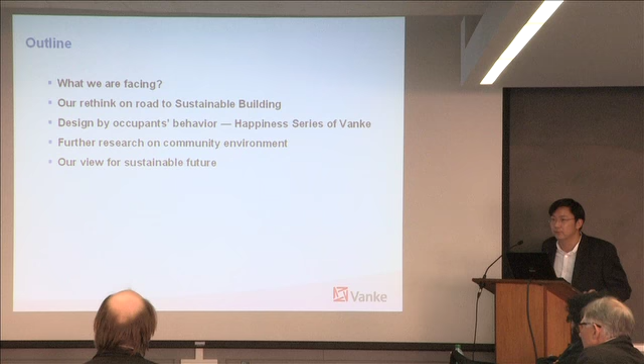First of all, let's see some interesting photos. This is 20 years ago in Pudong, Shanghai. See, there's nothing there, only vegetable gardens or trees. After 20 years, Shanghai changed a lot, becoming a new city, especially Pudong. So you can see 20 years changed a lot, 20 years made a new city in China.

Same for not only the coastal city, but also southwest cities like Chongqing. Chongqing is here, inside Sichuan province. This is the famous CBD commercial center in Chongqing, and you can see a big difference in 20 years. These two rivers, the Yangtze River and Jialing River, have different colors.

And this is Shenzhen. Shenzhen is quite close to Hong Kong, and some people may have been there. Here you can also feel the change sharply, many high towers rising in 20 years. In this CBD, you can see it after work, with cars parking on this high bridge. Before 20 years, it was just many hutongs and local buildings around. You can see China is growing very fast.

There's some data: in the past 20 years, we experienced the fastest urbanism around the world, and Chinese urban population increased by the equivalent of a fourth of U.S. citizens moving into Chinese cities. That's great, because we should build houses for such a great number of people. In the coming 9 years, it's also expected that the equivalent of 1/3 of U.S. citizens will move into Chinese cities. This is the greatest number.

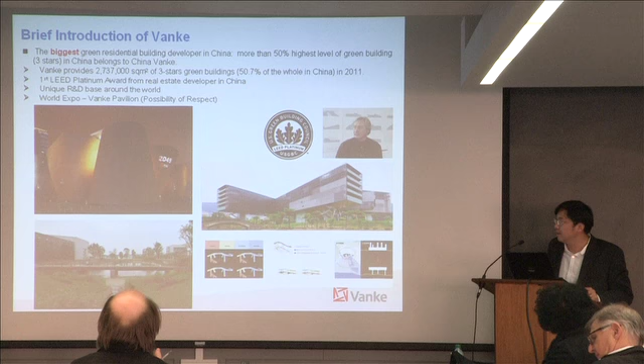I think some students of you from GSD have been to our R&D Center in Dongguan. This is a very big R&D Center. We do more research for building technology and also prefabricated concrete technology. I think some GSD students have been there.

Under these greatest, biggest, and fastest situations, we need rethinking. We can do some green buildings according to national standards, like 3-star or LEED, but this is only following the standard. These green buildings haven't raised a very good response from the market, maybe because we develop this for the government. So is it the only road to a sustainable future? We think about that.

There are 2 cases that help us rethink the future of sustainability. This is a good case, also a good market case because it has good sales, with a sale price around 20% higher than us. This building is quite interesting and comfortable with many high techs in China - for example, heat pumps, good air tightness, and shading around the facade. It also uses the latest European technology, ceiling radiant, and fresh air all around the house.

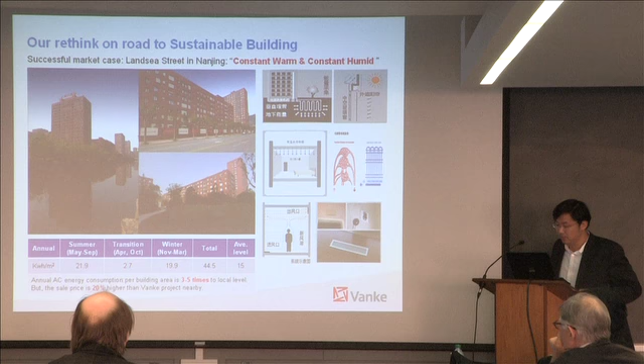There's also an interesting comparison of air conditioning in Beijing, where we can see different AC systems and their relevant net energy consumption levels. This slide is from some conference, showing 5 cases - 3 cases belong to split AC air conditioning, and D and E are for individual central AC and fully central AC. The interesting result is that split AC is the most energy-saving equipment in this market. This split AC is really traditional and you see it everywhere, while here there's much newer high technology, but the energy bill is not good.

So we're also thinking, what is the sustainable future? Should we use high tech to make our buildings more advanced, or should we think another way? We're thinking about the difference in energy consumption that comes from usage mode - part-time mode or full-time mode. This building uses what they call constant warm and constant humid controlled by one system, maybe just by one measurement to control the machine. So the different behaviors of different spaces will influence the system.

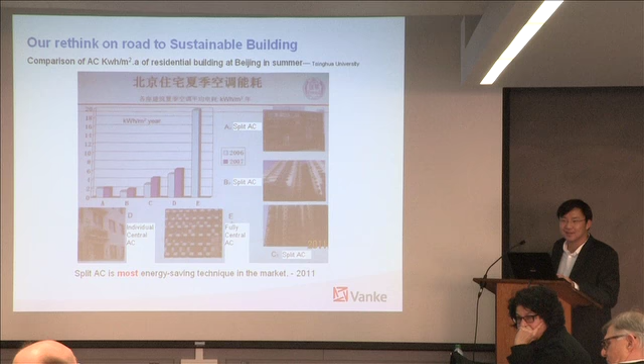So that's why we think about sustainability. We think of sustainability as a combination of three parts: one is market, one is customer, and one is energy bill. Because the market comes from the customer, and the energy bill also comes from the customer. So we should know about customer behavior, and we should also make the customer know this building well.

Then they can easily control and use the building more reasonably. Also, if the customer can feel the benefit of a sustainable building, they can buy this building again. So I think sustainability is not only about energy saving, but also the long-lasting usage by the customer, and also recognition from the market.

So the customer, in our words, also means occupants. The occupants need to know how to operate buildings well to achieve sustainable green goals. We should also try to make the occupants feel the difference of sustainable buildings, because now some people say the green is inside the wall and nobody knows it. Since green is a long-term effort, you should make people know this green building truly works well.

And this will make the customer buy and recommend this green building again, and this will achieve sustainable commerce. Combining all this together, I think we will really achieve the sustainable building.

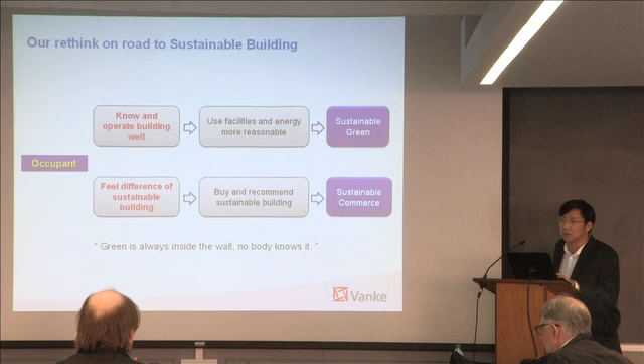Okay, then this is what we want to do. In the last 2 years, the Chongqing region of Vanke developed a new series called the happiness series. At the beginning, there are two pieces of background information. One is that our main customer in the Chinese residential market is the first-time buyer.

First buy means it is the first house for the couple. The characteristic of these first-time buyers is that within 3 to 5 years of their new home, their family structure will change a lot, because once they buy a house, they will have children, and in China, his or her parents will come to live with them to help raise the children. So at the beginning, there will only be 2 persons in the house, but in the coming 3 to 5 years, it will become 4 to 5 persons inside the house.

So we think about how to design a house, how to design this layout to accommodate this sharp change. Also, these first-time buyers take up close to half of our customer share, so this is our main customer. So our product is designed to satisfy these first-time buyers.

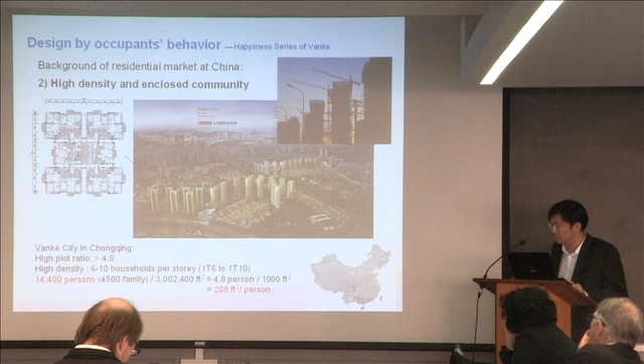So what's the purpose of the happiness series? We should provide more functions because families need to change in a short time. We should achieve more function with less indoor area, because the total cost of the Chinese resident market is quite high, and it's expensive for young couples to pay for new homes. So we should make less indoor area with less payment pressure.

This is our key value: we want to develop good and affordable apartments for common people. Good means good performance, meaning a sustainable building. Affordable means smaller indoor area with low total cost. Normally the layout of each family is around 60 to 90 square meters.

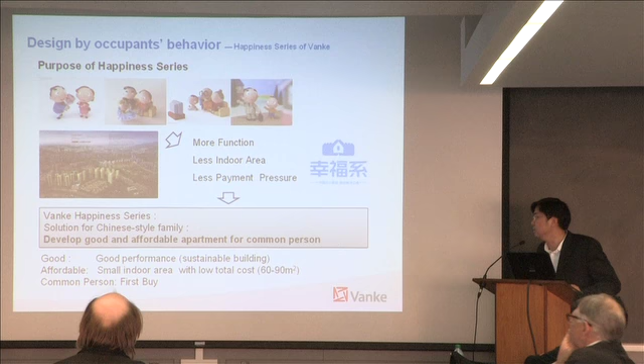So how do we decide a good house? This is a very famous formula showing where energy consumption comes from: P times S times E times C. As a developer, only the E we can try to address, because we cannot reduce the population, and the number of persons using equipment will increase fast anyway. The carbon dioxide per unit energy is controlled by the government.

So what we can do is reduce energy per equipment, which includes less time to run equipment and less energy per equipment. Less energy per equipment depends on the market level, because this belongs to manufacturers or big equipment companies, and also depends on what's available, affordable, and accessible.

So the only thing we can try is to make less time to run equipment, and we think this depends on occupants' behavior.

Less time to run equipment includes two parts: active design and passive design. For active design, we can use many sensors, databases, and HMI, IoT, Internet of Things, to make people know their environment very well. This HMI system can tell people what the environment is, and people can change the environment through IoT. This is a very futuristic system to make our homes smarter.

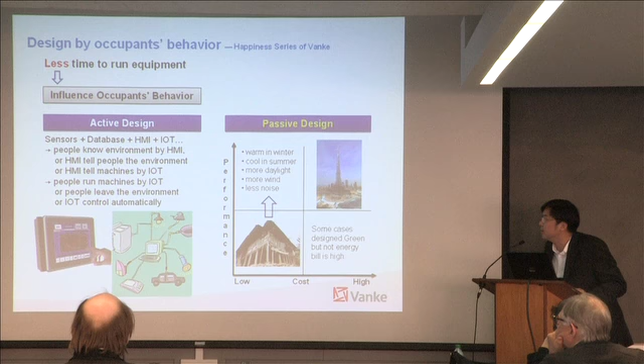But at the current stage, as a developer, it's hard to achieve this active design with such a complicated system. So what we can do is try to use more passive design to make our houses perform well. In this chart, you can see performance from low to high, and cost from low to high. This is our local house from many hundreds of years ago, and it still works today, but it's low performance and low cost.

We can also build high-tech buildings similar to the highest tower in Dubai, using high cost to achieve high performance, but this is quite expensive to copy everywhere. So what we try to do is use passive skills with low cost to achieve relatively higher performance.

The performance target is simple: warm in winter, cool in summer, more daylight, more wind, and less noise. Sometimes in certain cases we won't consider these, because you pay a lot of money but the actual energy bill isn't good enough. So we try to use passive design to achieve such value.

Passive design includes interior design and exterior design. For interior design, later my colleague Mr. Ma will introduce how we decide the layout based on occupant behavior over 24 hours, and how we use passive design skills according to local climate and learning from local residents.

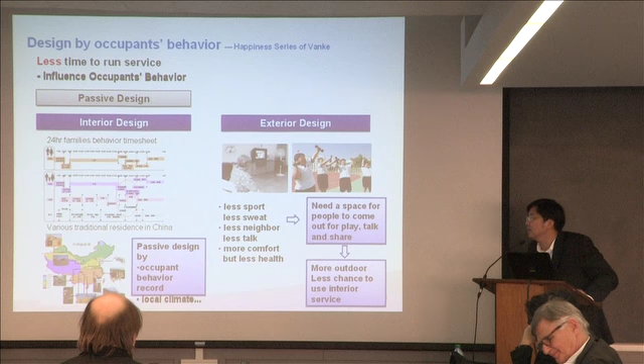A very important part is exterior design - outdoor comfort. Under such urbanism, more and more people move into high-density, high-rise towns, and people have less space and less width. So in China you see many overweight boys, and also lonely elders who always stay at home.

So we need a space for people to come out to play and just talk and chat. I think this is a future brand of Vanke should make people feel the Vanke community is full of love and full of happiness. So we hope to make people come out to share their experience and spend less time inside. Because in our mind, the more time you spend outdoor, the less time you spend indoor, and that means less chance to use the equipment indoor. So we want to try to put the people out.

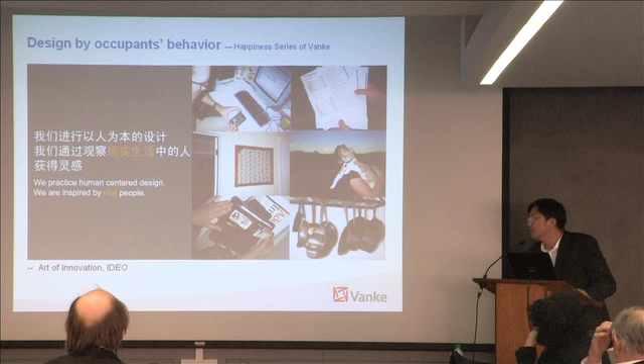At the beginning of describing how we design for interior, we want to share great words from IDEO, a famous innovation company, to make very remarkable design. For example, like the mouse from Apple, also designed by IDEO. This is a famous sentence because all innovation comes from human, from the practice, from the people. And we are the people, and our products are inspired by the real people.

So that's why we focus on the occupant behavior. I want to spend 5 minutes to introduce my colleague, Mr. Ma, to give a short introduction to his design for this layout according to occupant behavior. Mr. Ma is our chief architect for this happiness series. Thank you.

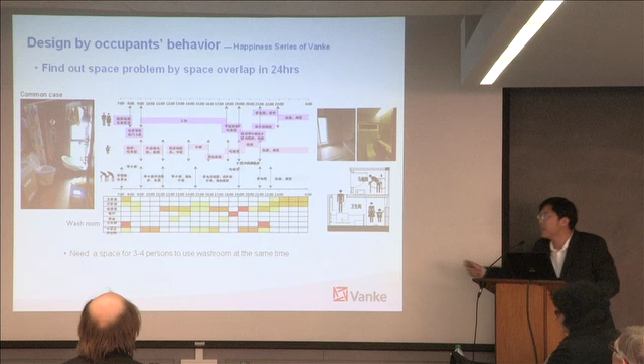Okay, thanks. I'm only given 5 minutes, so I think it is easy. As an architect, I want to find a different method of design. This method must be in truth, must be fact. Not in feeling—I think feeling is vague. So the next 3 points are the methods of design during my work.

The first is space overlap in 24 hours. I think I can find out the space problem by space overlap in 24 hours. In this sheet, this axis is the time—the 24 hours between 7 o'clock in the morning and 6 o'clock the next day. It's just 24 hours.

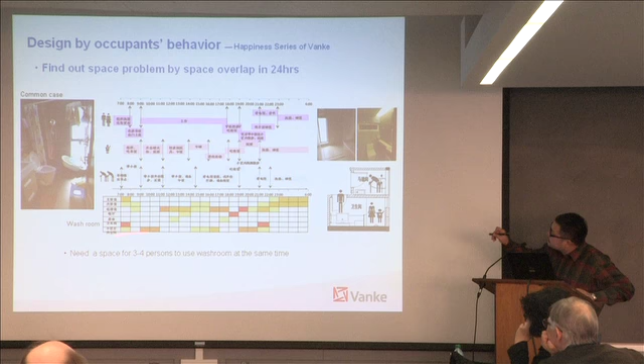So we found this way—the color is very dark. Very dark means so we divide the washroom into the toilet, the shower, and the washing face, between two rooms. So we found we need the space for 3 or 4 persons to use the washing room at the same time. So that's the result of the washroom. All of this is the result of overlap in 24 hours. This is one method of design.

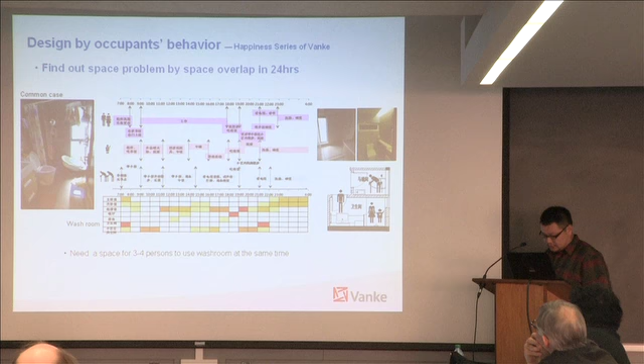And the second is quadrants. So this is the model of quadrants. This axis is customer importance, and this axis is customer satisfaction. We found the first dimension is the basic demand of customers, and the second dimension is potential demand. So we must focus on the dimensional demands. The method is we list all the demands of the principal bedroom.

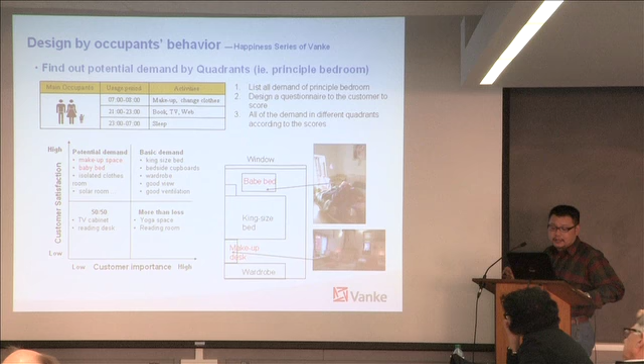So such as bedroom—the principal bedroom, we list all the demands of principal bedroom, and we designed a questionnaire for the customer to score. So by the score number, we list all the demands in different quadrants according to the scores, such as the king size bed in the first dimension, so it is the basic demand, and the makeup space and the baby bed in the second dimension. So we will focus on the makeup space and the baby bed in the bedroom.

So this is the result of our principal bedroom. This is the result, and this is the before. So this is the second method, the quadrants.

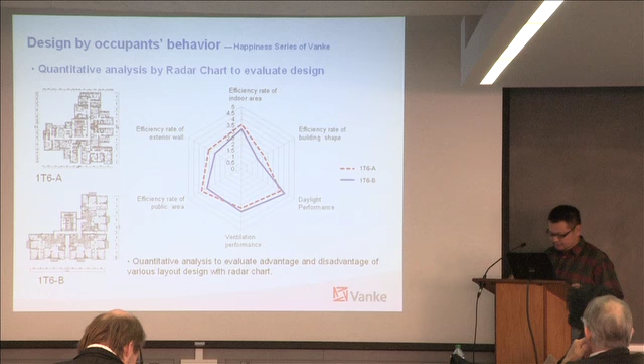Okay, thanks, Mark. Here is our three main methodology to design our layouts according to the occupant's behavior in 24 hours. We use the quantitative analysis method to do this.

My English is very poor, so any question can be answered by Mr. Zhou. It's okay, my English is good enough. You should hear our Chinese. It's terrific. We should try to use more reasonable thinking for our design, not only just by a flash of our mind.

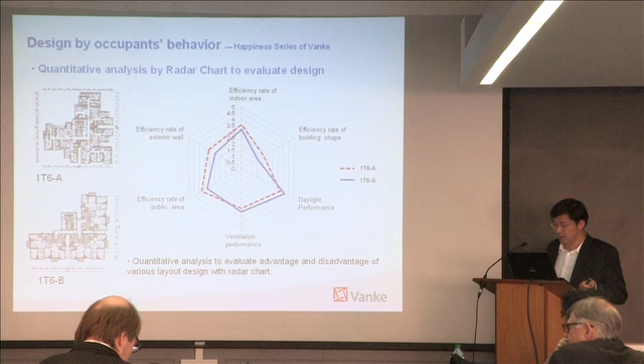We try to use some methodologies to evaluate our products and also evaluate our design. Then we will go back to a case in Chongqing, which will show how we use passive design and make our buildings more friendly to the local climate.

Here's Chongqing, a very interesting city. Some people have been there, and it's quite hot. We met there the spicy girl or spicy food, and the reason why they're so spicy there is few wind. You can see that the wind per meter per second around the year in Chongqing is quite low.

The city is sitting on two rivers, so the humidity is quite higher. You see the high temperature with high humidity and less wind. This will rise a very severe problem of the cooling system and make the people feel stuffy.

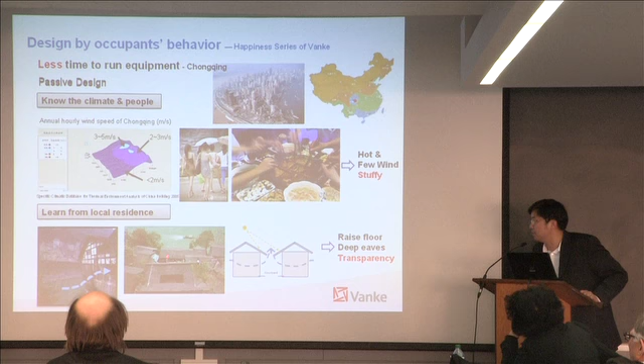So we want to try to learn from the local residents and see how we can do that. This is a very traditional house sitting along the sea with a raised floor to make the cool winds come inside. We try to make our buildings more transparent.

Also this interesting village, sitting beside the river, we can see open and close, open and close, and they can easily absorb the cool winds at night and make the winds come inside this village. This can make a lighter cool air in this microclimate.

It's also true for this high-rise building, because Chongqing is a mountain city. They use the difference of the height and just use the buoyancy effect to try to make this cool wind come up from the bottom. You see all the floors wet because this wind is more humid.

For this layout, we also use this close, open, close. We use the change of the section area, and also make this wind pass through all the buildings, making the layout transparent. By CFD model, we can forecast this wind conditions inside this layout is quite good.

It's normally more than 0.3 meters per second. It's good enough to remove the disease or bad smell away from the buildings in less than 2 minutes. It's very important for public buildings especially.

We also use CFD model to make all the towers getting wind by suitable orientation and form. As I mentioned at the beginning, in China we will have fast urbanism and also with many high-rise towers. For example, this is one community with 6 high-rise towers, around 100 meters and around 33 stories. We should just decide the orientation and forms of these buildings and see how we can achieve the best form of these 6 towers.

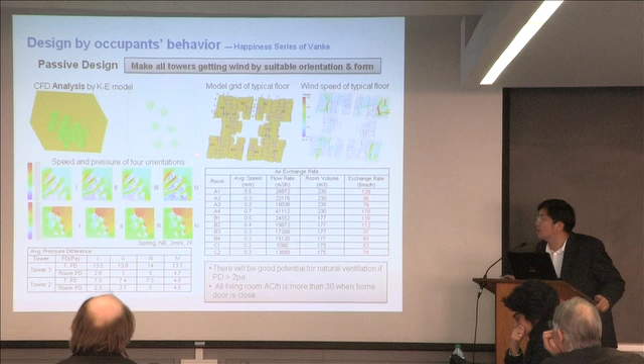They can guarantee this tower can get a suitable wind, because the constant wind from all around the year comes from the north. So this tower should be very careful, because this tower is after 5 towers. So we just change a little bit of these angles, orientations, and get better pressures on both sides.

A better pressure means they will have more potential for the natural ventilation to come through all the buildings. Then we can achieve the living rooms will reach more than 30 times air change per hour if we just open a window and close our home door. This will guarantee all the apartments, no matter facing the wind or opposite the wind direction, we can get a very good air change condition.

For most design, we think about these bedrooms. This interesting phenomena happened in Wuhan, also the same latitude as Chongqing, maybe 10 years ago. People slept outside the door, because at that time air conditioning was not that popular.

So the people slept outside on bamboo beds. This is very cool and very interesting. People could share their stories with a very good neighborhood.

Even in the morning, you should have some sleep to just calm down, because in the morning the temperature of the air is quite cooler compared with the indoor air. So you want to try to use this lower outdoor temperature for natural ventilation at night.

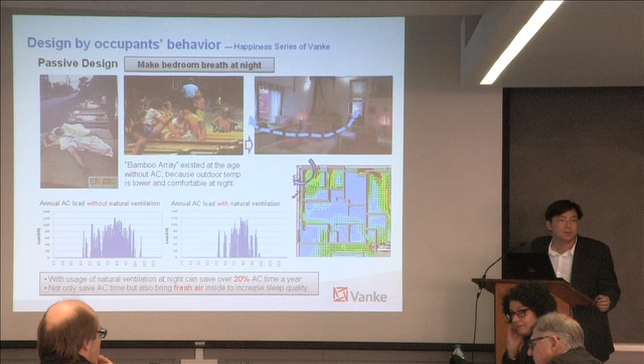Do you suggest different permutations of windows and doors at different times of day to occupants, or is it something they determine empirically? We will suggest them - we have to create a culture to tell people when to open the door and when to close the window, and help people know this building well.

Is placement of furniture important in that airflow? We haven't considered the furniture, because the furniture is designed depending on the occupants.

On a smaller scale, we also use specific skills to achieve better daylight according to occupants' behavior. For example, in this washroom, we want deeper daylight for face washing, so we use a vertical opening to make the daylight penetrate deeper, so children can easily wash their face without switching on the light.

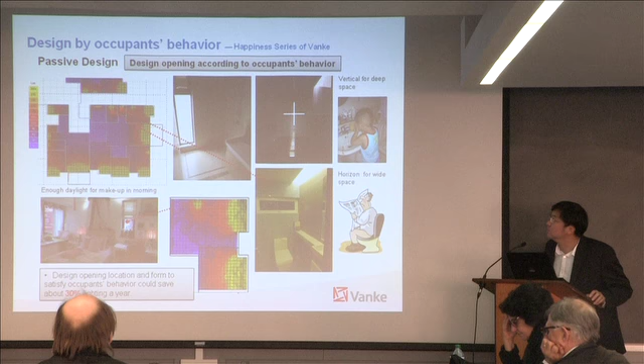For the toilet rooms, people will read newspapers and magazines, so we need to ensure good daylight span. We use this horizontal window to guarantee you can get enough daylight to read the newspaper where you want. So we design our daylight also according to occupants' behavior.

For the outdoor space, we use some technology - I think this is Rayman from Germany - and use this software to forecast comfort levels for outdoor spaces, according to this CFD modeling and also daylight and radiance. Mrs. Ray Yi will introduce this further later.

The reason we want to consider outdoor comfort is because we are losing good memories from our childhood, and we want to invite children to leave the high tower and come out to share their happiness together. So we decided on these play zones according to this CFD and software analysis.

For example, these are different zones inside this community, across the whole day from morning to afternoon, around each zone, showing the comfort level for different persons including elders, children, and adults. Then we can know which place is hotter for children and which place is more suitable for the whole family to play. Finally, we chose the place with better location, enough shade, suitable sunlight, and suitable wind.

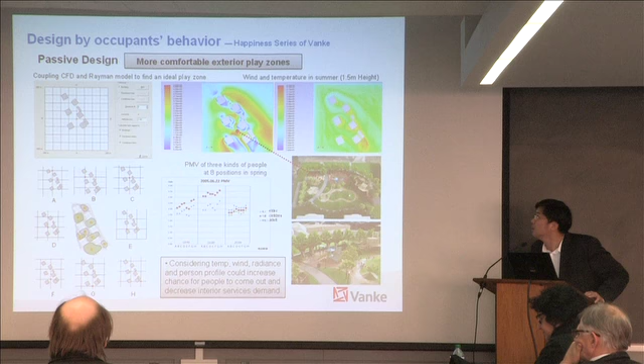So we decided we could make our location more reasonable according to the sunlight and daylight analysis, guaranteeing people can play here without being too hot or too cold, with suitable wind. This is what we want to achieve - this outdoor comfort - making a more comfortable place for people to play around. This is what I want to say.

We want to get some memory back, because we are losing happiness that happened in our childhood, so we want our community to be full of love and happiness in the future. We make further research on community environment, requiring more outdoor use and less use of plug power. Later Mrs. Yi will introduce more interesting stories from our Wuhan residential community, where we did research on different rooms and found many interesting results.

At the final page, I want to emphasize our views for a sustainable future, because the happiness of the community is the brand of development. There are three key issues: one is affordable with low tech, because high tech sometimes means high risk. So for such a big developer, we will try to use low tech, more low tech, for it to be easier for people to afford.

Ensure it should be real green by the energy bill. And then the last is health is priority for us, because sometimes we can buy comfort, but health we cannot buy.

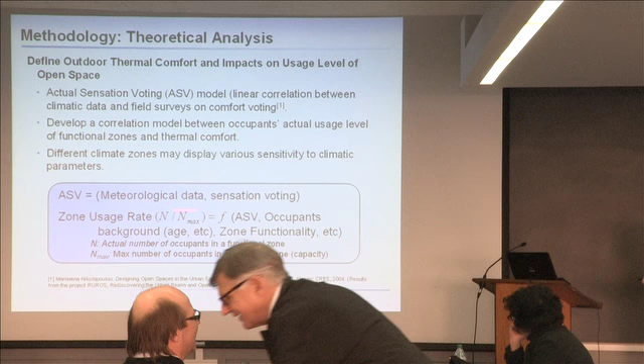We've done the research and the experiment measurements there in the Wuhan community. The other model we developed is a zone usage rate, for the functional zone. You have different zones for people to stay in, so how many people will stay there? Basically, your actual number of people staying in this zone divided by your maximum number of people, the capacity. This usage rate is really a function of your thermal comfort, the functionality of your zones, and also the occupants' background, among many other issues.

So basically our study, our experiments and the data analysis are really based upon these two correlations.

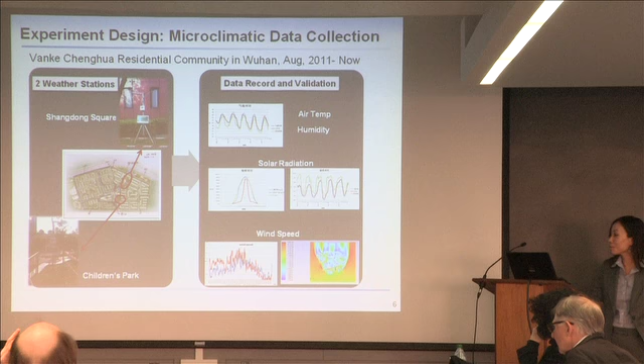Regarding the experiments, we set up two weather stations, just like the two pictures I showed you. One is in the Shangdong Square, which is an empty place without any play area, but it can be very comfortable in the summer. The other one is a children's park, in the playground. We set up another weather station to measure air temperature, humidity, wind speed, and solar radiation. The data has been continually monitored starting from last August.

In addition to the microclimate data measurements, we also did occupant surveys and records. We surveyed three groups of people: elderly, adults, and kids. We observed 11 types of typical activities, like simply sitting, babysitting, dancing, or playing with others—different activity types.

This is a community area in Vanke, Wuhan. We covered all the central activity zones, like the children's place, the Shangdong Square, and some other plazas. Basically there are 6 areas where we actually did the research surveys and occupant surveys.

We chose 4 different time periods to see occupants staying there: early morning, afternoon, and evening. From August to December we surveyed over 400 people regarding their thermal sensation voting—whether they feel comfortable or not. Besides the survey, we also did observations to record how many people stay and play in different areas, what their activities look like, and how many elderly people and adults were present. So we also did the report.

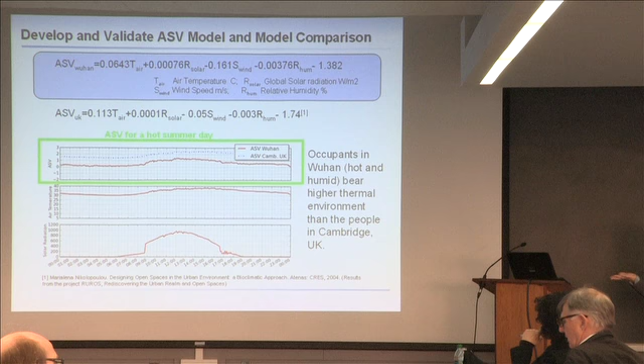By doing the study, we actually found some very interesting statistical numbers. In this community area, there are a total of 11,000 people, a very large community. Among them, 56% are adults, and elderly will be 25%.

But if we look at the outside occupants composition, there are 2,300 people actually going outside on a daily basis, so basically 20% of people go outside. Most people stay inside. Among these outside people, adults are only 30% and elderly are 40%. So there are more elderly people going outside and staying outside.

If we divide the outside activity people by the total number of that age group, you can see for adults only 10% would go outside to do activities, while for the elderly and children, 30% of their age group would stay outside.

Is this now the mean value over the day, or is it on a specific time of the day? Because I would conclude the adults just have to go to work, they have no time to go outside.

This is a mean value. So that's the main reason why they cannot go outside, because they have to go to work.

It would be interesting to see why, if you did this rating at 6 or 7 o'clock in the evening when everybody is home from work, or on a Saturday when everybody has the chance to go outside, maybe the numbers would be similar. Because this implies that children and elderly people want to go outside while adults want to stay inside in front of the TV, or whatever.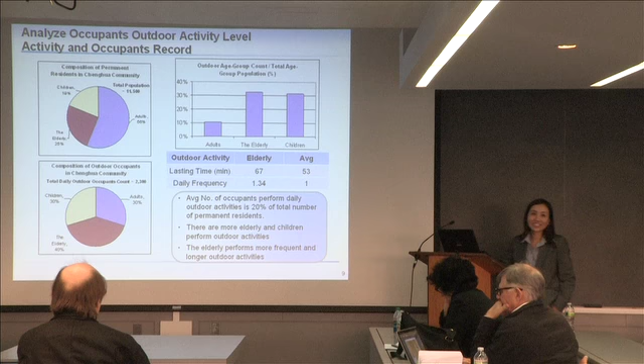So the other part is, once we got all those statistical numbers, we tried to devise some models or correlations between the ASV, your comfort, and also the correlation with the actual usage of the space. For example, for this children's park, we have the weather data, so we know what the ASV should look like, and then we count the numbers according to different weather conditions, how many people will stay there.

We then normalize this to the average zone usage rate, for example as a percentage. So you have a maximum, 100% of people would stay when the ASV outside is comfortable, at 0. As it gets hotter, fewer people stay outside. Same when it's getting cooler, fewer people stay outside as well. So that's basically the trend, based on the recorded data.

The same applies for Shandong Square as well, we have the data for that too. So we can develop this kind of normalized average usage rate for the different functional zones.

Actually, there are some interesting findings. I don't want to talk about this very linear, simple formula. But the interesting part is more like the blue line is for children's park, and the red line is for the Shandong Square. So we can see when it's comfortable outside, maximum people will stay in that area.

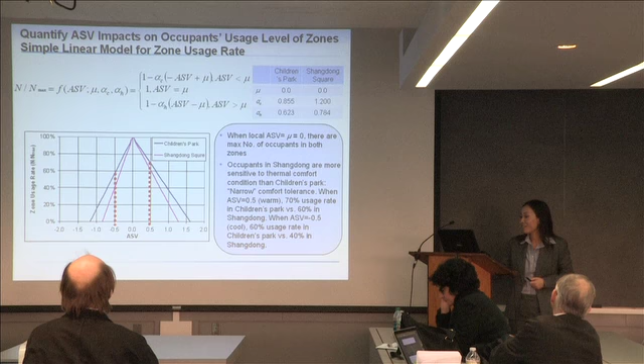Having small kids, you go to the playground even when it's raining, being happy to get them amused. You must stay there longer.

But we also, by using that kind of model based on the measured data, tried to expand that study to the whole year. For example, for the Shandong and children's park, we found the air temperature is very similar in those two areas. You would predict that in the children's park, there are about 3 months you would feel hot, the ASV larger than 0.5. In the Shandong Square, you would only feel hot for about 2 months. So without good design versus with good design, you actually help reduce outdoor discomfort time by 1 month.

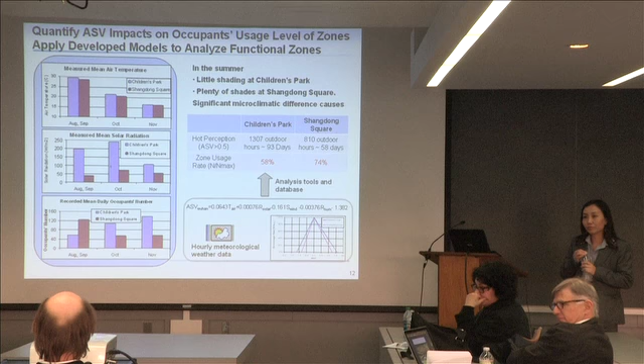Okay, but in a certain way, you've now proved it by measurements, but everybody, if you had asked me, I would have told you an unshaded playground is less occupied than a shaded one, especially in a hot and humid climate where solar exposure is one big issue with respect to comfort. So the question, I think it's a nice proof of a certain kind of basic knowledge. We know we should design outdoor playgrounds in specific climates to react to the solar exposure or the wind exposure.

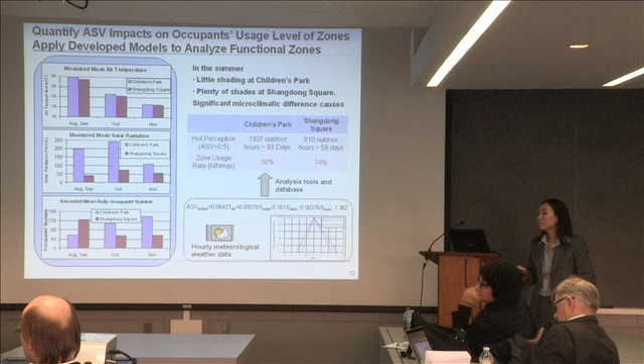The question is generalizing the data. So if I understand, you had about 500 people that you surveyed, and based on that you came up with this formula? And how many people did you measure occupancy for? More people, a lot more, I think. Actually we surveyed 500 people, but when we observe, for example, I just stay and observe there are total 20 people here, I observe that and their age group, I just report that. So there's an overlap between the sample used to derive the formula and the sample used to show that the model predicts what's going on. Actually that's in parallel - you use partial data for the model, and another partial data for comparative analysis. The question always is how general is that data function?

I agree we have somewhat culturally specific functions. But we can't do this experiment in every project, so we somewhat have to come up with maybe regional, country, or ideally climate-specific models. Yes, absolutely. This really depends - even in China it depends on which area we're talking about. In this area, with little shading, people will love that. But in the northern region, I love the sunshine - the first time I went there, I saw people don't like sunshine, even in winter time they don't like it. I feel very strange about that, actually. It really depends on the region. That's why we cannot really use a universal model or universal design rule applied everywhere.

During some of the recent hot summers in New York City, it was discovered that playground equipment elevates temperature considerably depending on the equipment. For example, in Manhattan, it was discovered that recycled tire safety matting was causing second-degree burns in children on their feet because it was exposed to sun and heating up unbelievably hot. The same with artificial turf, where in New York City they measured 160 degrees on a normal sunny summer day around the fields, which was then radiating outward from the fields to create an envelope of heat.

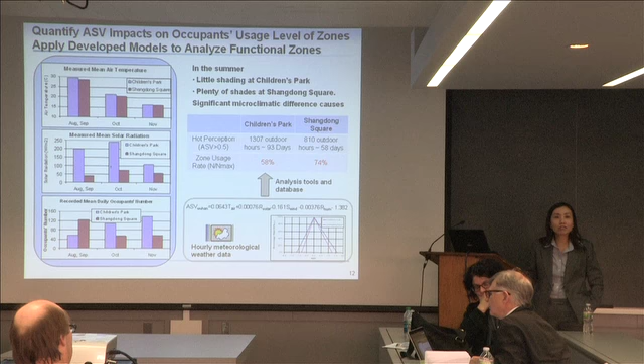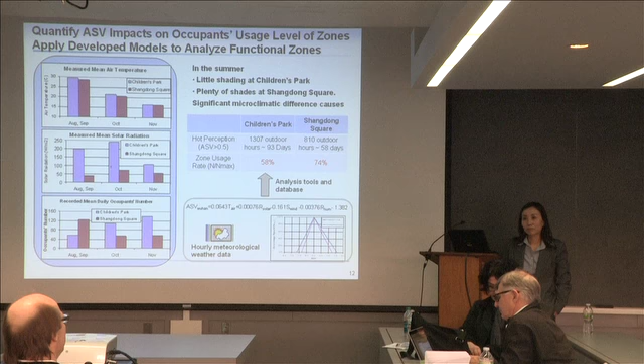But some areas can get very hot in the summertime. I think normally in the equation, as you'll see in my presentation, we take into account what kind of floor, what kind of absorption on the floor, what kind of capacity it has during daytime as well as nighttime. If you have a massive, highly absorptive floor, you'll read at midnight that there's still heat coming out of it. If you have a thin floor with no capacity, it heats up fast, so at daytime you get a problem, but at nighttime it cools down fast and improves.

So absolutely, the long-wave radiation and surface heating caused by solar radiation is embedded in the residuals of this regression model. The ASV is a statistical model that probably has an R-squared for its prediction power. I don't know if you listed the R-squared of how well that matches, but what about sky temperature in the equation? I didn't see it. I think the ASV model only lists solar radiation, humidity, wind, and temperature, and hasn't included the surface temperature.

But for other thermal comfort metrics, like PMV, you have to take into account the mean radiant temperature. Yeah, exactly, that has to account for everything. But that one is more suitable for indoor use. For indoor, the surface temperature won't be as high as outdoor. Anyway, that's a whole theoretical discussion, but it would be interesting to say even in ASV you should maybe include the mean radiant temperature—you can define a mean radiant temperature even for outdoor.

What do you want, dry-bulb temperature? What do you measure, dry-bulb temperature or operative temperature? You could report what is the wet bulb temperature.

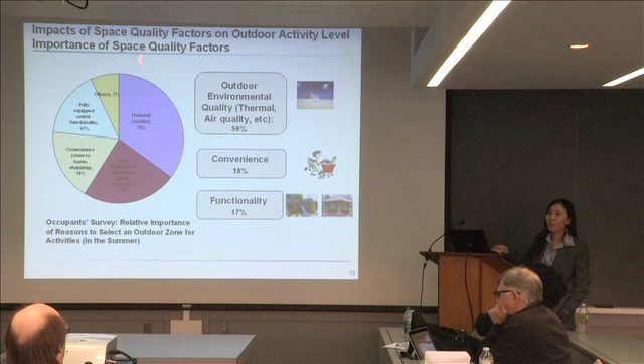So anyway, some quantitative and qualitative study has been conducted to provide guidance to designers and operation personnel on how to create good quality outdoor environments associated with activity levels. For the future, we'll continue this kind of study, because only half the data won't really provide a solid model for us.

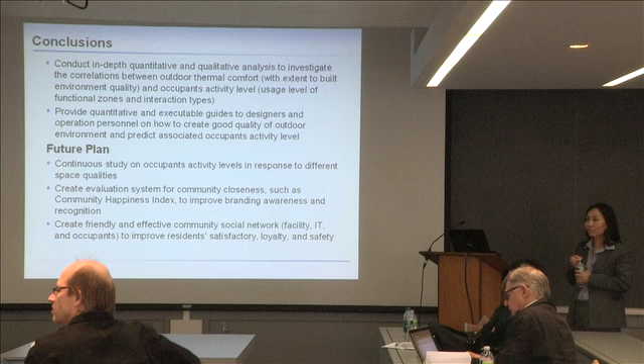I'd really like to understand, because we end up with these individual formulas for every city, and that's not practical. If you compare your formula to the Fanger model, how much difference do we talk about, and how far do you think we could start implementing sliders, so in a consultancy firm you'd say the Danish Fanger extreme is here, the Central Chinese extreme is here, and just tweak it in between. Do you think that's possible?

I think that's possible. Actually, the reason I really want to compare against the UK model is that a larger group of European researchers did research several years ago with different regions from Spain to the UK, or even North Europe, so they have different adaptive comfort models. You can really compare those models against each other to try to find a suitable model for different weather climate zones, and hopefully use that climate zone to represent local outdoor comfort pressures.

Just to follow up, how standardized is your weather measurement? Because if you want to do that in different cities, assuming you don't want to travel to all cities in the world, the measurement equipment has to be completely identical everywhere so we can start having a database. Are we there?

No, but first you would need, certainly, because you wouldn't be able to do all these measurements individually in each city. What you certainly need, and I'll show in a minute for Doha, is to be able to take the available weather data from the airport and then transfer it by rating wind, shadow, microclimate into the dense downtown, evaluating these downtown areas depending on the more general weather data.

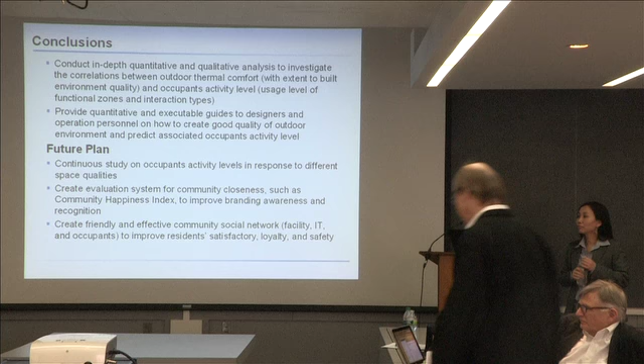I think we'll be looking forward to your presentation materials though. I think there's not much literature comparing the ASV, the survey-based thermal comfort, versus PMV that's based on human energy balance. There are a couple of papers comparing equivalent temperature versus the energy budget method, but I haven't seen a study paired with an ASV study.

But one consensus is there's a big convergence in thermal neutral - whenever that's calculated with the heat balance, I think most people respond similarly. The problem comes at the hot and cold ends, where the tolerance of people towards thermal stress is different, and that happens both in terms of adaptation and in terms of the generational change.

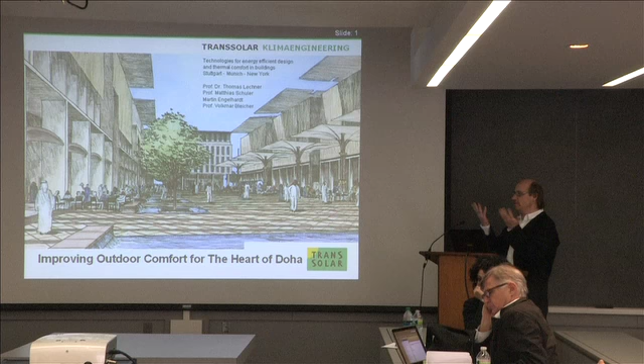Yeah, I would say in this respect, Mrs. Yee's measurements are really great, because it would be wonderful in a certain way to take our model and recalculate what the perceived temperature would be, and compare it in respect of acceptance to the survey they made. I think the analytic method would be to take the measured weather data, run the perceived temperature model, come up with our rating, and compare this rating to what we found - so in a certain way I'm more focusing on the method.

This is a project downtown Qatar, Doha. This is the center of Doha. At the top, you see where the new museums by Nouvel and OMA are. This is where there never had been souks - they now decided to build souks, to build the so-called heart of Doha.

And so this is the model, this is the site going back, this is what they're building there. It's roughly around one million square meters of development they're building on this.

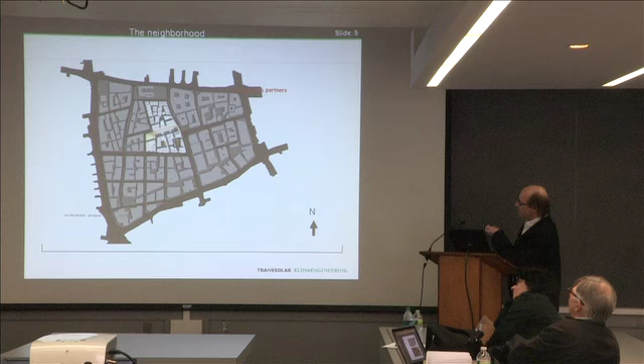What we're looking at mainly is this outdoor space, called the heart of Doha. To give you a number, this is roughly 200 meters long and 40 meters wide. They were totally aware of what Arup already followed in the master plan, with very narrow streets to get self-shading. Now this is an open space, so how do you treat this outdoor space?

Michel Mossessian won the urban design competition. He designed these arcade buildings, but still this open space is quite exposed to the climate.

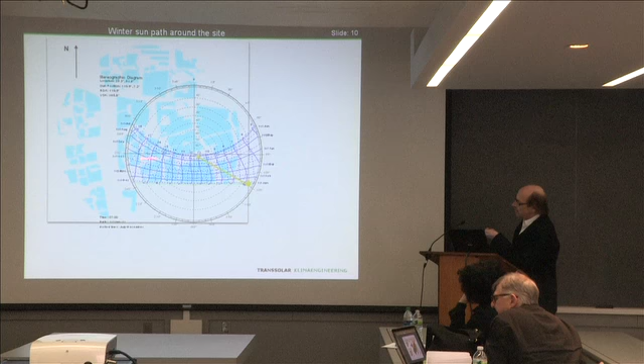So the question was, if we look at Doha's climate, the sun is quite high in summertime, in winter 45 degrees, and it runs nearly east to west along the big plaza, so you get quite good exposure. Weather data shows mean annual temperature of 27, so it gets quite warm, with a lot of sun, around 1700 hours, which is remarkably less than in Abu Dhabi, around 30% less. It's more hazy in Doha.

The outdoor air temperature reaches up to 45, 47 degrees. In a certain way, the outdoor dew point and air temperature sometimes really reach each other at nighttime. So you reach at nighttime whatever 85 to 90% humidity. That's as well why you're really up here, in the range of 25, 27 grams per kilogram. This is really humid.

When it's really hot, at 40 degrees, humidity drops down into the range of 30%. So at this point of the day, there would still be a certain evaporative cooling potential.

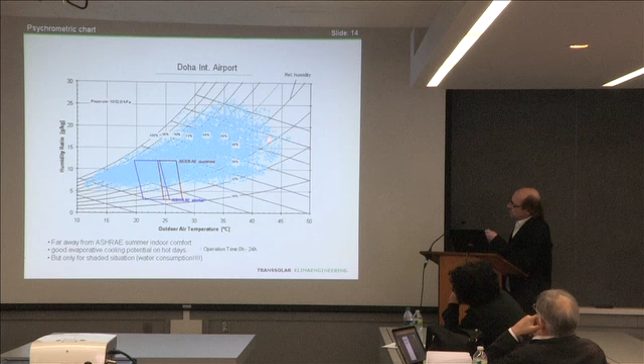Even in this climate, we have a straight northwest wind with quite high wind speeds. In a certain way, you see it 42% of the time, nearly permanently. This is from May till October, during the hot period, you have a permanent wind.

Then in June you have something very local, the so-called Shamal, a wind which in a certain way speeds up during daytime until, in the late afternoon, it increases. So when the outdoor temperatures are really hot, the wind speeds up, which is a real problem, because this is not a nice breeze, this is a 47-degree hot wind.

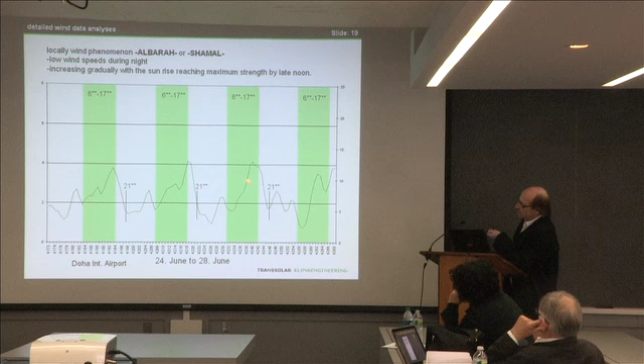This is me showing over 4 days for Doha Airport how you can see, in the afternoon, from 6 o'clock in the morning it's low, and then it speeds up until around 5 o'clock in the afternoon. You can really read the daily peaks in the wind velocity.

Now, as a kind of conclusion on the climate, what we then did was ask how we rate outdoor comfort. That's the point. We all know the operative temperature definition, we just had it yesterday in the lecture, the rough calculation of 50% air and 50% mean radiant of the surrounding. But solar radiation and humidity are not considered in this case.

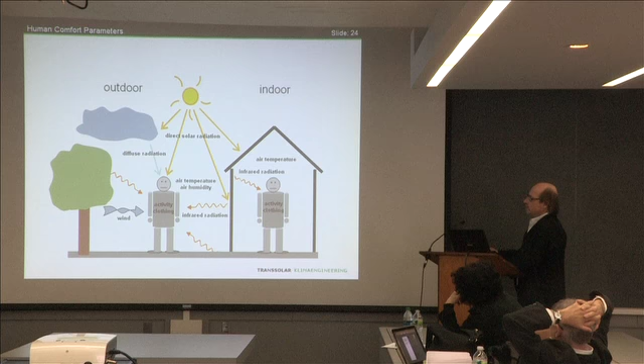And therefore, certainly, there's the PMV, the predicted mean vote. Indoor and outdoor, you have diffuse radiation, solar radiation, and in addition the wind. So you have much more factors to consider.

That's why, in a certain way, they adjusted the PMV method into a PT method, and PT now defines different comfortable levels. It's a perceived temperature, which is a comparable temperature to what you are measuring in respect of temperature, humidity, radiation, air velocity, and mean radiant temperature.

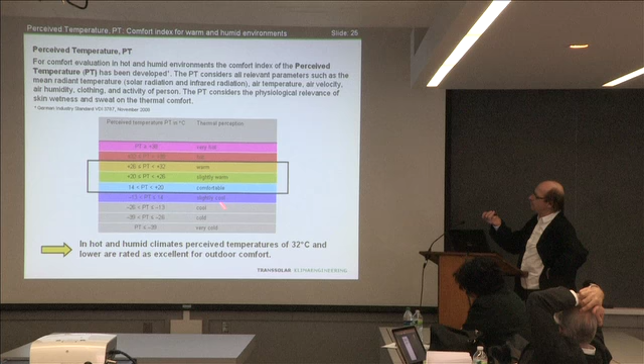This comparable temperature, if it's between 26 and 32, is rated as warm. In the first moment you would say 32 must be unacceptable indoor, but outdoor, 32 is still acceptable as a perceived temperature. Then if you go between 32 and 38, it starts to get hot, and above 38 it really gets hot, slowly getting into the dangerous range.

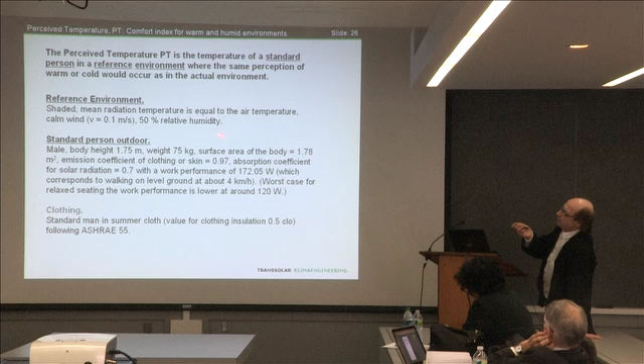So in a hot and humid climate, a perceived temperature of 32 and lower is rated as excellent outdoor. This perceived temperature is related to a reference environment, a standard person in a shaded position at a mean radiant temperature equal to the air temperature, 32, with calm wind and 50% humidity. That's, in a certain way, the standard.

If you say you reach a perceived temperature of 32, this is for someone sitting or standing in the shade, being exposed to a mean radiant temperature of 32, an air temperature of 32, calm wind, and 50% humidity. So you can calculate this perceived temperature for any outdoor condition. The standard person is whatever 1.7.

It's a certain person with a certain skin, a certain absorption, a certain working performance. In this case, it's slowly walking, which is what you typically do outdoor. This is considering 172 watts internal heat production, compared to a sitting person where you typically get 120.

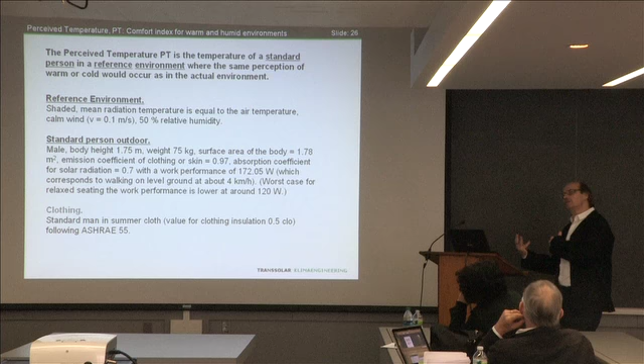So if you use the model to rate outdoor sitting, you can assume that your perceived temperature would be less. The standard model is based on a summer clothing value of 0.5, which is like a summer's clothing.

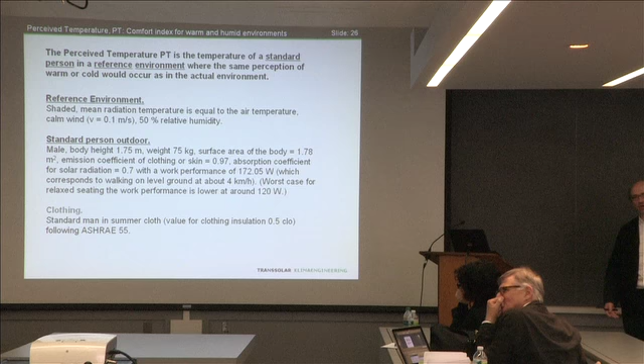Was part of that assumed that women would not be in a public place in Qatar in the middle of the day? No, it's independent from gender, whereas even Fanger's original values depend on gender. So we made it neutral. And women in Qatar would be fully black dressed with just the eyes slit open. I'm always wondering why they dress in black, because solar absorption is unbelievable. It's clear they would never go into the sun, because they would just fall.

I typically say this is as well taking into account, as I mentioned before, the possibility outdoor that you can have a humidity film on your skin, and then the wind can create much better cooling. You would never accept indoor to start sweating, because you would already start to complain. But outdoor, you can complain, but to who?

So that's a bit the history. Fanger defined in 1970 the predicted mean vote, and then there were some adjustments made. Then Gagge and others tried to find a better model for hot and humid climates, and finally they introduced the perceived temperature as a model for rating outdoor comfort as a function of humidity.

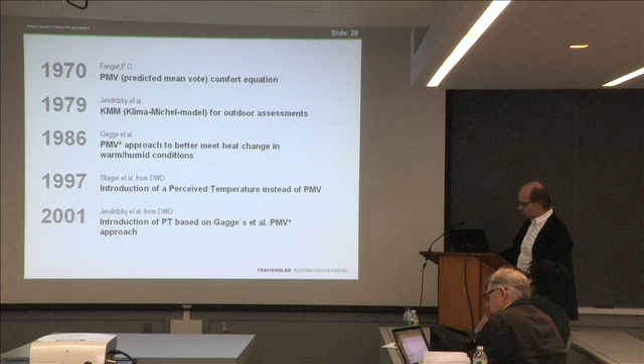Now, the British have a method to rate outdoor comfort with the wet bulb globe temperature, which is another measure to compare outdoor comfort. A wet bulb globe temperature of 26 would correlate to a PT of around 32. This is where typically we say up to 32 is the warm area, 32 to 38 is hot, and above that is rated as very hot.

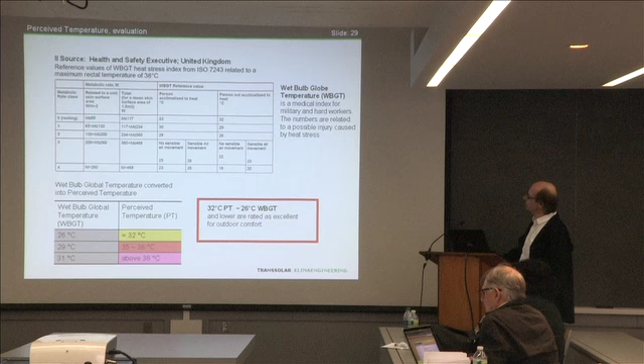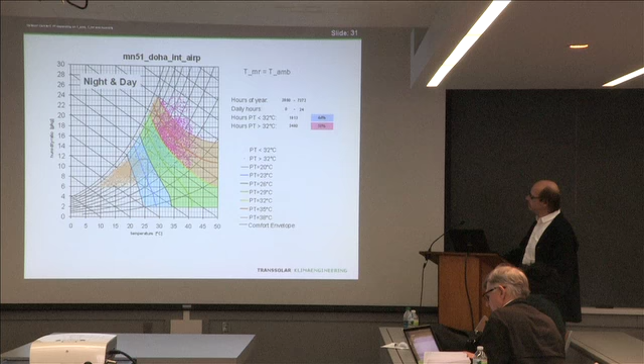Now, if you take this model and say, for example—because I think that's what we were missing until now—you define the target, but where are the strategies to improve the outdoor comfort? That's what, in this case, we were working on for a client: he tells us you have to improve the outdoor comfort in Doha to make this outdoor space more useful. Now, what strategies are you using?

So, for example, if in Doha you are increasing the wind velocity, exposing people to higher wind velocity, this is rated only during the hot months, May till October, from 9 till 1 and from 4 to 10 o'clock, because that's what they expected.

Normally nobody in Doha goes outdoor between 1 and 4 o'clock, because everybody knows it's unbearable, especially in summer. So limited on outdoor spaces, but even then, increasing velocity affects your comfort. This year, how many hours percentage are hot or warm? 11% hot, 30% another, 68% very hot. And increasing the velocity is even reducing the comfort.

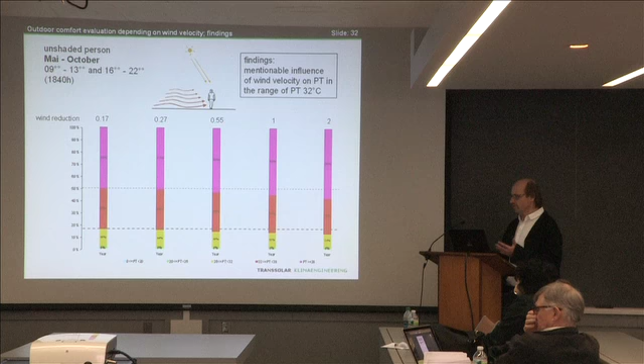This is specific for this climate, knowing that at that time of day, normally outdoor temperature between May and October is above 32. It's clear the wind is a heat source, so increasing the wind is not creating comfort, especially if you are not shaded.

I think that's as well interesting. This is now exposed to the sun. If you do it for a shaded person, the same one, this is now assuming a certain wind protection. Comparing an exposed person to a person shaded permanently during the day and night, to a person shaded during daytime.

But the measure is open at nighttime, because re-radiation at nighttime from your ground, your thermal capacity, is quite important. So you can see the improvement of hours where it's only warm, coming from 15%, moving up to 25%, just by having an operable shading instead of fixed, which at nighttime opens and allows you to re-radiate against the sky. That's an improvement.

Then adding a low E coating, for example, we had it yesterday in the lecture. A low E coating means the heat of your shading, which normally gets warm - and always when I'm sitting at a street cafe below a typical Coca-Cola umbrella, which is dark red, you can feel the heat radiate. You're in the shadow, but you can feel that it's 35, 40 degrees just heating down to you. I always said, why does nobody advise Coca-Cola to do a low E coating on the inside of their umbrellas? Because it would do a lot.

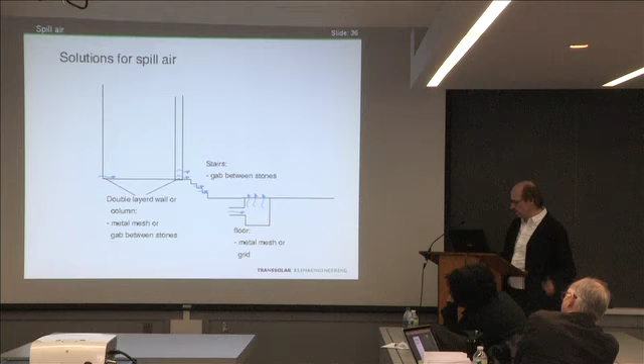So we said, if we build a bathtub in front of all the stores, where it drops down into a sunken area, all the cold air flowing out of the buildings, as people come in and out, would drop out, being connected in this sunken garden. So in a certain way, that's what we call spill air.

If you collect the spill air and connect the floor to the ground, where it's still 27 degrees but still quite nice if you are facing it, that's a floor tempering connecting to the ground, plus the spill air, you can improve the numbers. You can see the violet nearly disappearing, not totally, but even in August it had been nearly at 100%. Now they're going back.

If you add the operable element, you can do an even better wind protection. The wind protection, this is the WT factor, is the reduction of wind velocity. With even better protection, you can improve it further.

And if you do it over the day, the range between 26 and 32 is a comfort range, unshaded. Then you do the operable shading, then you add the low-E and the spill air with further protection. You can see how you can shift the hours per year from mostly too hot outside to a majority being in the comfort range.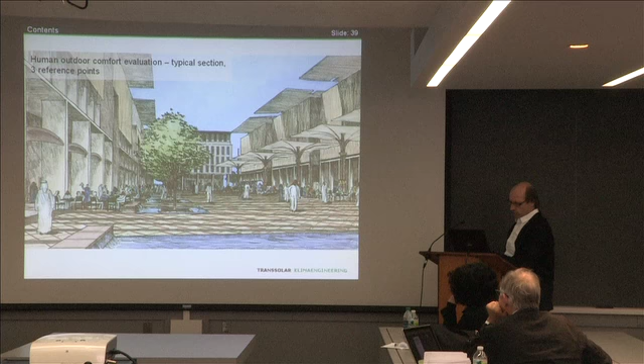So what we looked at for this plaza was 3 defined spots, and we did shading studies calculating, for March and December, how many hours a day you get exposure, what percentage of sunshine hours you get exposure versus shade. 100% blue is in the range of full shade, 0 or orange is only 20% shade, and you can see this rating for any hour of the year.

This is now for March, where the sun is going up, remembering this is going east-west. And then the same for June, where it's quite critical, where the sun is really up. The overshadowing of your building doesn't help a lot, because the plaza is too wide to get self-shading from the building.

That's a macro CFD model of the whole development. Now zooming into our plaza, close to here, you can calculate for the 3 spots we chose the wind reduction or wind increasing factor. This is calculated for the main wind direction, allowing us to rate that at a certain spot it's increasing the wind velocity, while at other spots you are much better protected.

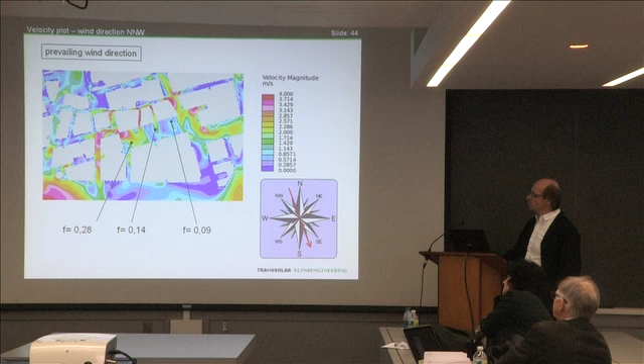So that would be a space where you'd put an outdoor comfortable space. Comparing the strategies: having a big shading over the whole space creates one strategy. Putting people below the arcades, where they're more exposed to the spill air, you can see we nearly lose the violet, it's only half the time comfortable. Or having this sunken garden strategy in front of the arcades.

So looking at the plaza in section: this is the area where you're sitting outdoor, tempering the floor connected to the ground. This is the sunken garden where the cold air spills out from the arcades into a so-called bathtub. Or option 2, being just below the shade. You can see the great differences between the outdoor comfort in the different areas, depending on the measures you decide to go for.

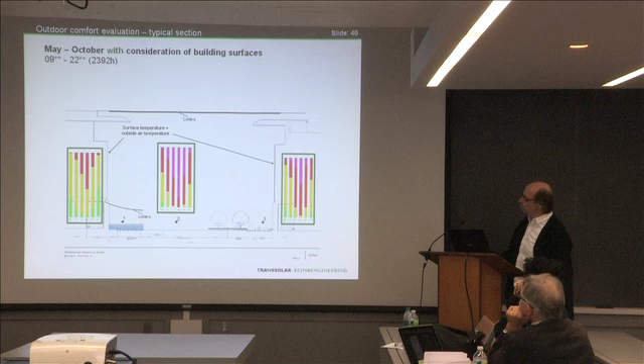We proved this with an airflow analysis to show that this spill air coming out here, you see the temperature, when the door opens from this shop, there's 22 or 24 degree air spilling out, typically heavier, because cold air is heavier than warm air, so it stays at floor level, but it spills out. So this is the bathtub we created in front of the arcades.

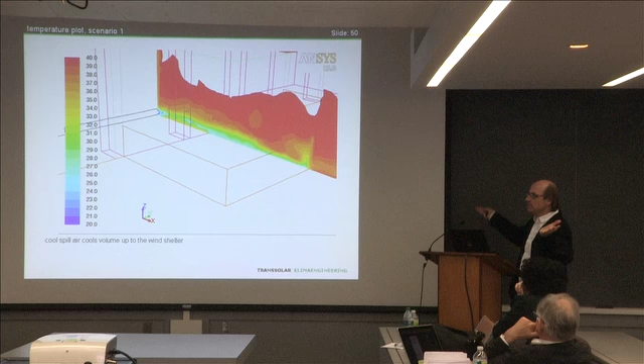So in a certain way, you can capture this amount of air, instead of just losing it to the outside. You're trying to keep it in a certain area, which now comparing to the outside, you see this is now a temperature comparison. In the bathtub, you are more in the range of 29, 28, 30, where on the big plaza, you are already in the range of 36 to 37.

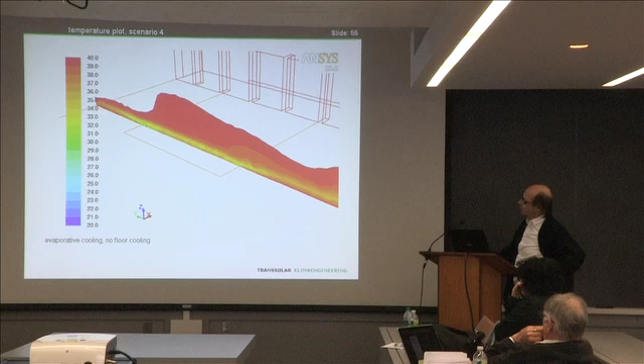If you do a section on the other side where you only have the arcades, no device, no sunken garden to capture the cold air, it's pretty fast disappearing. Then in the center of the plaza, in that section, this air is nearly already gone. At a certain height, you're still in the range of 39 to 40 degrees, and that's a plot where it even reaches above 40 in the central area.

So in a certain way, that's the surface temperature. In your bathtub, you have a floor temperature in the range of 27, 26, because this is mainly determined by this cold air, where in the area where we activated the floor connected to the ground, we could at least keep it in the range of 34, while in the middle of the plaza, even below the shade, you couldn't limit it to a certain temperature.

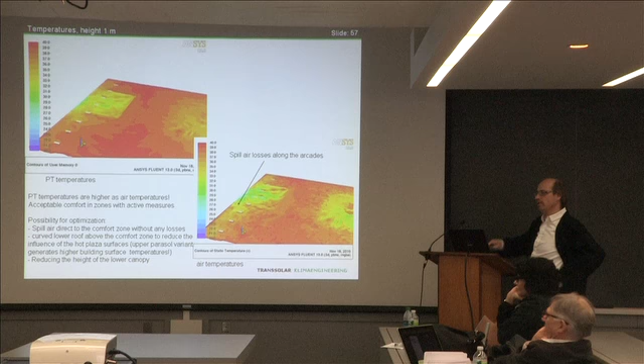So, Matthias, what height did you cut the floors? Is it near the ground, or is it like... Yeah, no, this is the surface temperature, and this is at a level, I think like 80. Typically you raise... surface temperature. Yeah, one was surface, the other one the air temperature, is like 1 meter above ground.

Now, what was very interesting, the architects and especially the client were quite alarmed, saying that if you pull a big shading over this plaza, this will totally destroy the outdoor feeling because you will feel like indoor. So one of the proposals we finally made was to create a shading which is transparent for low angles, but for high angles kind of cutting off.

So it's kind of undulating, and it's even retractable, so it had to be retractable. But it allows, in a certain way, that if you stand on the plaza and you look through, you can really see the top, even the top of this hotel.

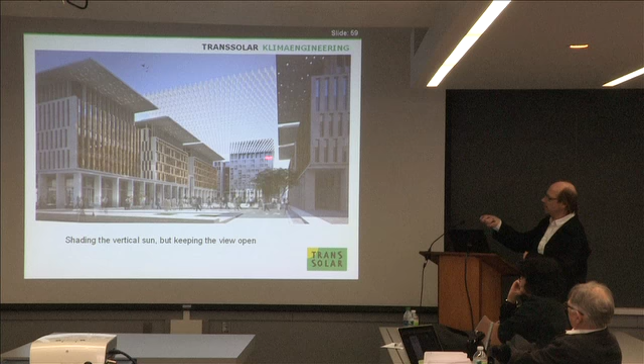While if you stand there, we did the evaluation of it. We evaluated in this case. You see the low morning sun, this is now around 8 o'clock, is partially going through, but as soon as you get around noon, depending on what design you're choosing, you get it quite tight in respect of shading, while then in the later afternoon, again you get still a higher transparency.

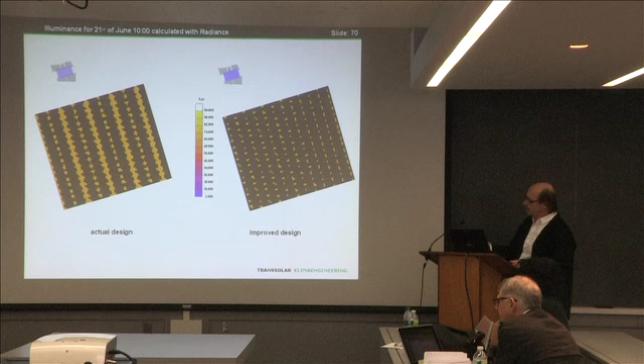And then this is kind of calculating the lux levels below it, so you can see you still have spots in the range of 50,000, but over the whole area, this is much better. Comparing this, I'm now comparing the two designs.

And in a certain way, this is now comparing the two designs in respect of percentage of transmission. So this is now for the 1st of December compared to June, where with the improved design we could mainly cut it down in the critical hours, in the range of 5 to 15%.

So in addition, we said, now where's the energy coming from, in a certain way, to do, for example, keep one of the floors connected to the ground? We kind of estimated, even if you would do, depending on the quality of your photovoltaic system, 15 to 5%, you can run a chiller and provide a certain amount of energy for conditioning, and we were just defining this.

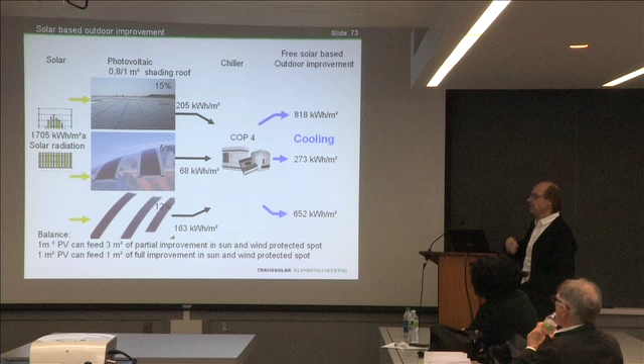Having a PV integrated on the shading, you would create cooling potential even for the connected building out of the shade. You can as well use some of this cooling potential for doing further improvement, because that was a big discussion: where would the energy come from if you want to do a clear mechanical improvement outdoors?

Because if you want to get it much better, even better, than you do it by passive measures, you may think of active measures. So like, let's say, a photovoltaic umbrella, which is not only doing the shade, but uses the shade to span photovoltaic, to run a little chiller which creates cold air at the foot of the umbrella, can even improve the comfort further while still being energy neutral to the surrounding.

And I'm closing it off with this one, and we used this as the base. This is the final presentation for the Qatar soccer project, which was part of the decision submitted to FIFA. So you have seen this before, this is the kind of comfort range we're working with.

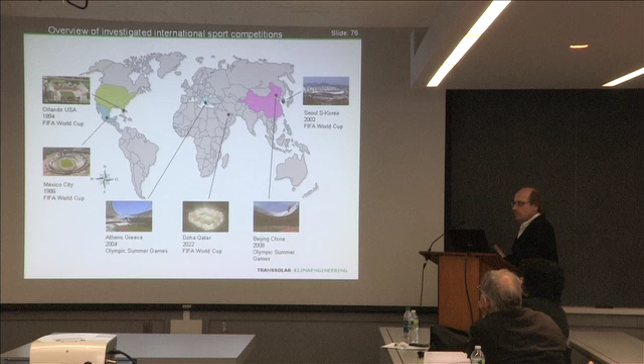What we did was compare, because everybody was saying doing soccer in Qatar with respect to outdoor comfort is unbearable. We said, but if you compare Qatar to Florida, where the FIFA World Cup was in 1994, using the perceived temperature method, you see all the measures. This is pitched, depending on the time of year it changes a lot. Orlando, for example, was quite hot.

Now this is Qatar if you do nothing. Then the typical perceived temperature would be mostly in the range of very hot. But we said, if you do certain measures, we want to get this down to here, which is Mexico City at that time of year when the FIFA World Championship was there—it was kind of acceptable. Now we want to get this here.

We could show FIFA that with certain measures in the stadium—low-E coated shading, displacement air ventilation, cooled soccer field—we can achieve this for the stadium. These are the temperatures without anything, and these show improving the comfort with certain measures. You can see you can drop it from 38 for the players down to 35. A 3 degree difference in perceived temperature is a lot.

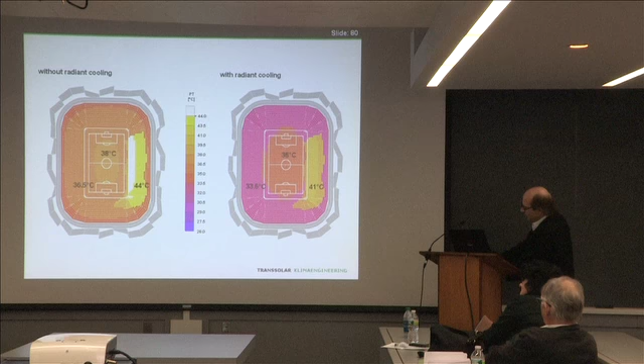And even for the spectators, as long as they're not exposed to the sun, you can reduce it dramatically as well. So in a certain way, outdoor comfort improvements typically lead to a win. Thanks.

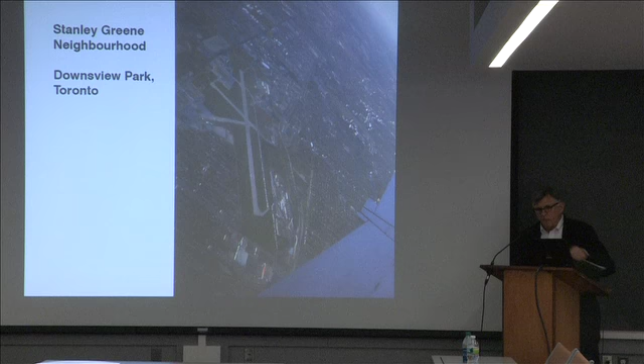Where it can work with pervious paving of some sort, where you can add pressure to it and actually extend it out over an area. And if you do that, you can redirect it depending on the model, as to where the shaping is of the floor, you can redirect it onto targets that would use it to assist in those areas. You may have to add to it, you may have to chill it, or take the rest of the air.

I think in a sustainable approach where we want to build less, your reduction of the specific unit size, in all the breathtaking numbers you're showing of how many square meters or housing units you need, is clear. If each housing unit has 20% less, at the end you will build 20% less, which is a relief for the environment. So it's not only about the economy, where people have a certain budget and either decide not to buy an apartment, or if I want them to buy an apartment because that's my core business, if I do smaller apartments with the same or even better quality than a larger one but they invest less money, I get more people into the business to buy an apartment. So I think it's quite interesting that in this case, your interest as a developer and the interest of the environment to build less are similar.